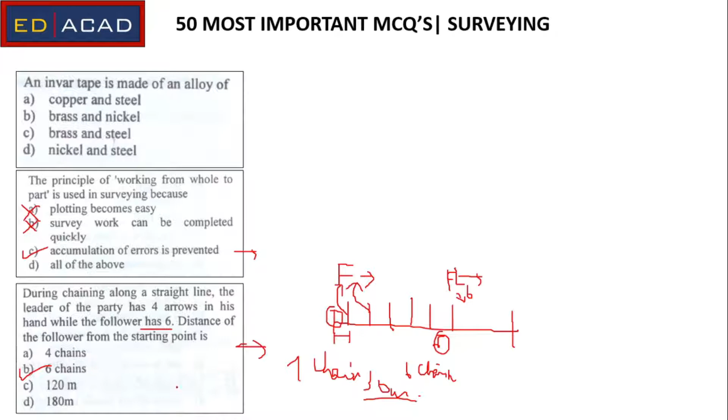Let's move ahead, let me clear this.

Let's understand a few things here. The brass tallies are provided at every 5 meter distance from the starting point of the chain, so they'll be provided at 5 meter, 10 meter, 15 meter and so on. But at the first 5 meter distance, the brass tally provided has a shape like this — these two things will not be here, it will only be like this. So this is the shape at 5 meters.

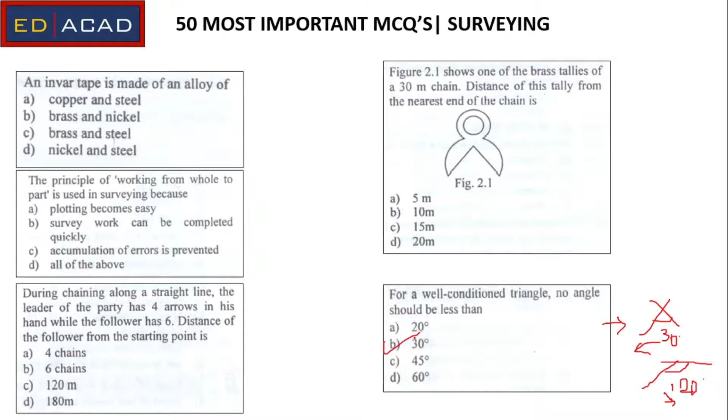Let's understand this. In an optical square we have two mirrors, and these are placed at an angle of 45 degrees, and we need to do some adjustment while taking measurements with the optical square. But when we use a prism square, we have a prism placed inside a circular tube, and these angles are fixed.

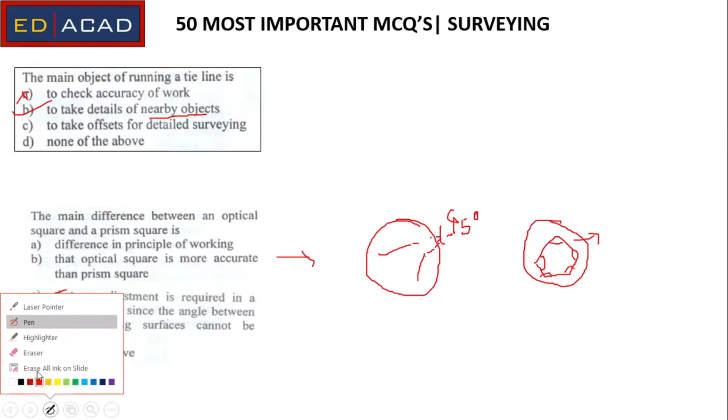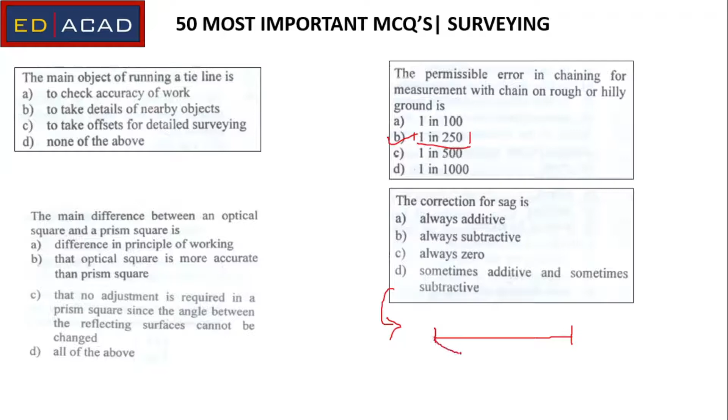Next, the correction for sag. Let's understand this. When we use a chain or tape to measure a horizontal distance, due to sag the position of the chain or tape will be something like this. So the correction formula is true value minus measured value.

In this case, this distance will be the true value. But due to sag, the measurement you take will be the sag measurement, so this becomes the measured value. The correction equals true value minus measured value, and you can clearly see that the measured value will be greater than the true value, so the sign of correction comes out negative. So the correction for sag will always be subtractive.

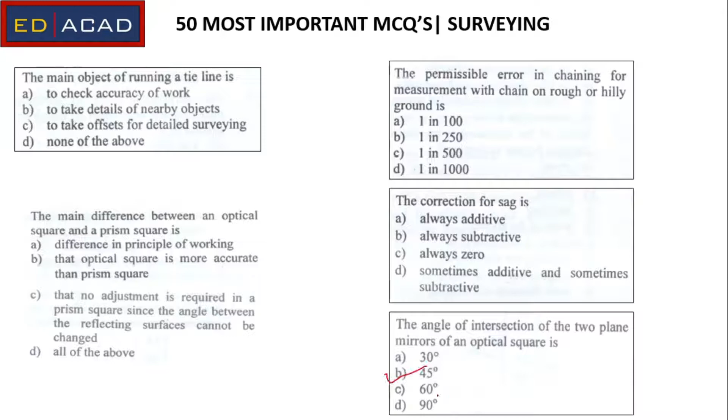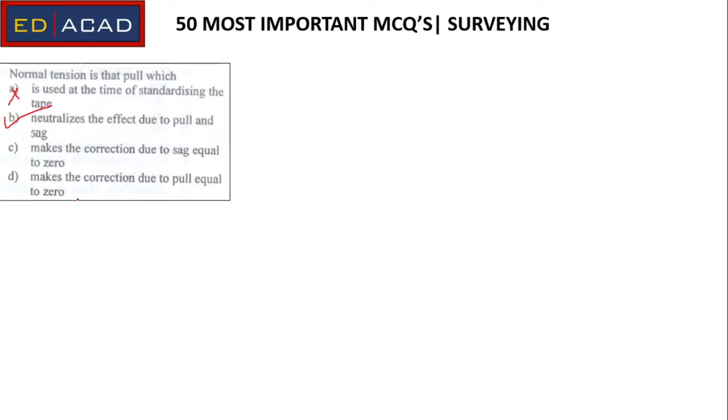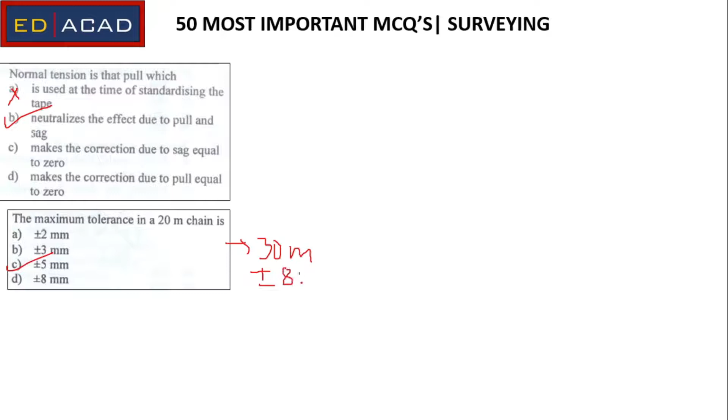Let's move ahead. The maximum tolerance in a 20-meter chain is plus minus 5 mm. Also, in case of a 30-meter chain, the tolerance is plus minus 8 mm. You should keep this in mind.

Let's move ahead. If the fore bearing of line AB is 35 degrees and that of line BC is 15 degrees, then the included angle between the lines is... Let's understand the concept of included angles here.

For finding the included angles, you need to keep two things in mind: the included angle is always measured in the clockwise direction, and it is measured from the previous line to the next line. This you should keep in mind.

Let's look at the problem. If the fore bearing of line AB is 35 degrees, let's plot this. Let's say this angle is 35 degrees. This will be our A, this will be our B. And that of BC is 15 degrees, so this will go something like this. So this will be C, and this angle will become 15 degrees.

So the included angle between the lines—let's apply these two parameters here. The included angle is always measured in the clockwise direction, so the clockwise direction is either this or this. The second parameter says from previous line to next line. When we move in direction ABC, our previous line becomes AB and the next line becomes BC. So from previous line to next line, this will be our included angle. Let's show it in a different color—this will become our included angle.

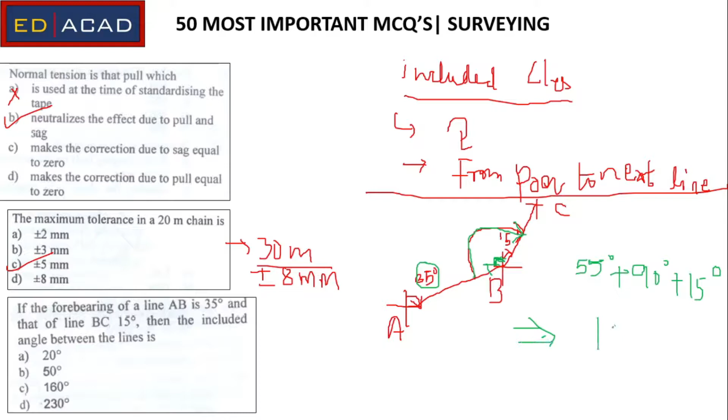Option C will be correct. Okay, let's move ahead.

So in the prismatic compass, the magnetic needle moves with the box. The line of sight does not move with the box. The magnetic needle and graduated circle do not move with the box. The graduated circle is fixed to the box and the magnetic needle always remains in the north-south direction.

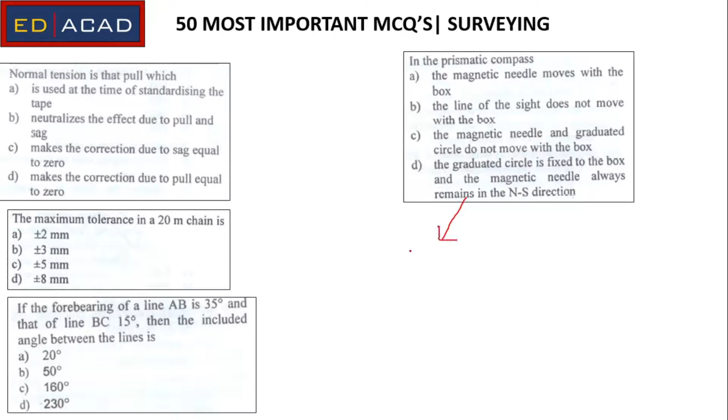So generally we use two types of compass in surveying. The first one is the prismatic compass, and the second one, widely used, is the surveyor's compass. I'll show the picture of both of these compasses. This is the prismatic compass which you can see in the figure, and this is the surveyor's compass.

So now let's discuss some of the differences between these two compasses. This will be the prismatic compass, let's write this as PC. Okay, so let us look at some of the

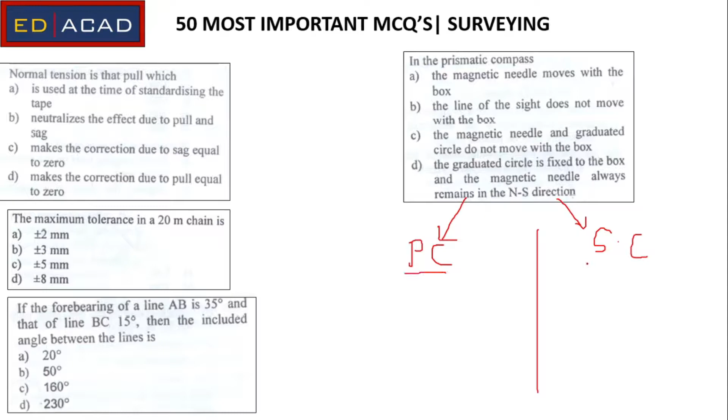differences, the major differences between these two. Let me show you the figure once again. In the prismatic compass, as you can see here, we have a broad needle which is attached to the circular graduation dial. So the graduated dial or graduated ring is attached to the needle, which is of broad needle type, while in the case of surveyor's compass we have a bar edge type needle, and this needle, you can see here, it's not attached to the graduation ring, it is free. So the graduation ring in case of surveyor's compass is attached to the box, it's not attached to the needle.

So these two differences you would have noticed. Then the next difference is that in case of the prismatic compass we get the reading in whole circle bearing, because the graduations are something like this. So we have north, south, east, west. So we have 0 degrees at the south, 90 degrees here at the west, then 180 degrees here, and then 270 degrees here.

While in case of surveyor's compass, the graduation is something like this. So here is our north, here is our south, here is our east. You need to remember this, that east in case of surveyor's compass comes on the left side, and then west. And we have 0 degrees at north, 0 degrees at south, 90 degrees at east, and 90 degrees at west.

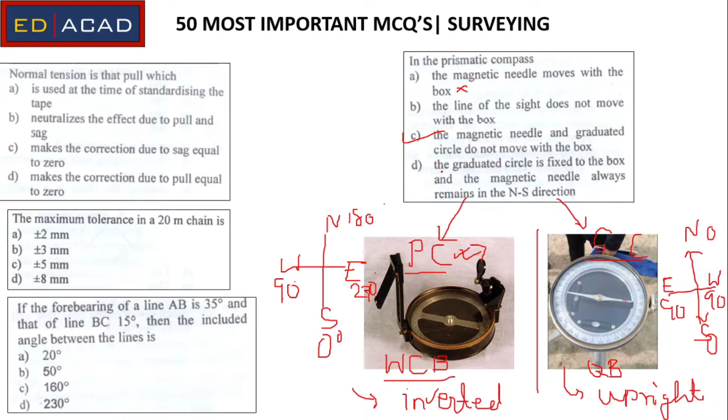The magnetic needle and the graduation circle are attached to each other and they are placed on the pivot, and they do not move with this box. The graduation circle is fixed to the box — no, so this becomes wrong. It is not fixed with the box. That is the case in the surveyor's compass. So option C will be correct. Let's move ahead.

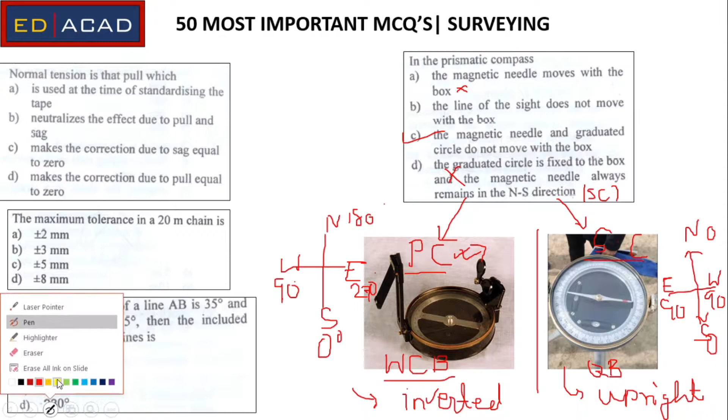Answer A is right. Next, which of the following shown in figure 2.3 represents the correct graduation in surveyor compass? We have 0 degree in case of surveyor compass at north and south, and west and east - no, here in this direction east is there. So option D is correct, just as shown in the last slide.

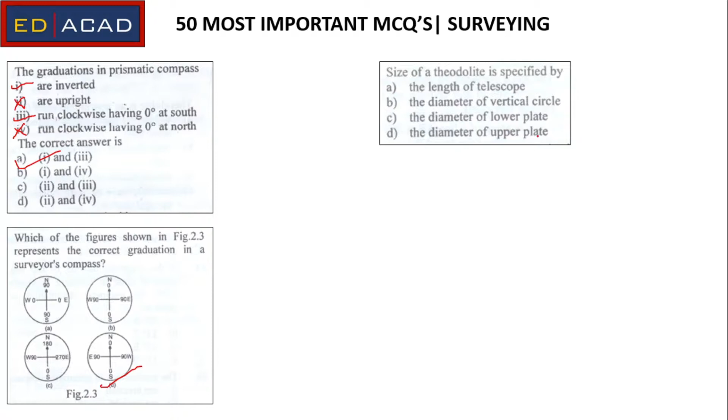Next, the size of a theodolite is specified by the length of the telescope, the diameter of the vertical circle, the diameter of the lower plate, or the diameter of the upper plate. The size of the theodolite is specified by the diameter of the horizontal circle, and in the horizontal circle, the diameter of the lower plate. So option C will be the correct answer.

Next, a telescope is said to be upright when the vertical circle falls on the left side of the surveyor and the bubble is up. It will be called inverted when the vertical circle is on the right side and the bubble is down. Let's look at our options: the vertical circle is to the right and the bubble is down - so option A is correct. Let's check the others: vertical circle to the right with bubble up - no. Vertical circle to the left - wrong, it should be at its right. Again vertical circle to the left - wrong. So option A is correct.

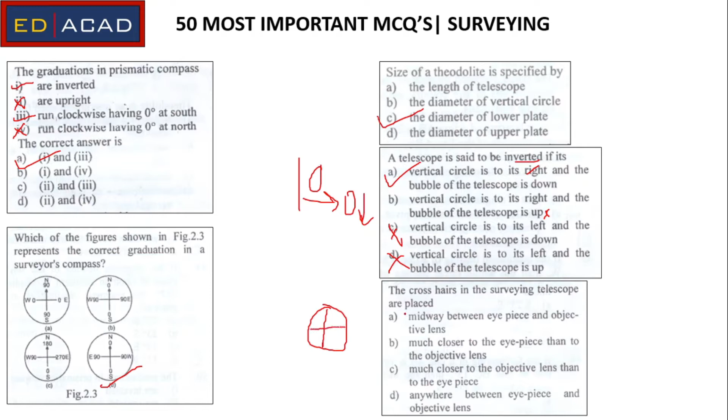Next, the crosshairs in a surveying telescope are placed - let's look at the options: midway between the eyepiece and the objective lens. So this is the eyepiece, this is the objective lens, here we have our eye, and from here we look - this is our objective lens. The crosshair is placed somewhere here, very much close to our eyepiece. So the option stating it's much closer to the eyepiece than to the objective lens - option B - will be correct, because it is placed much closer to our eyepiece.

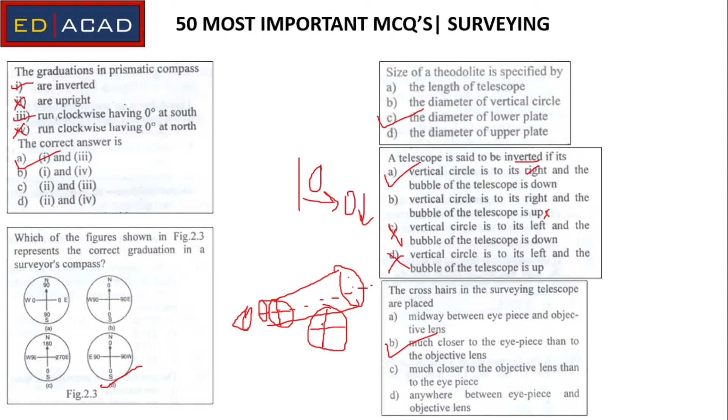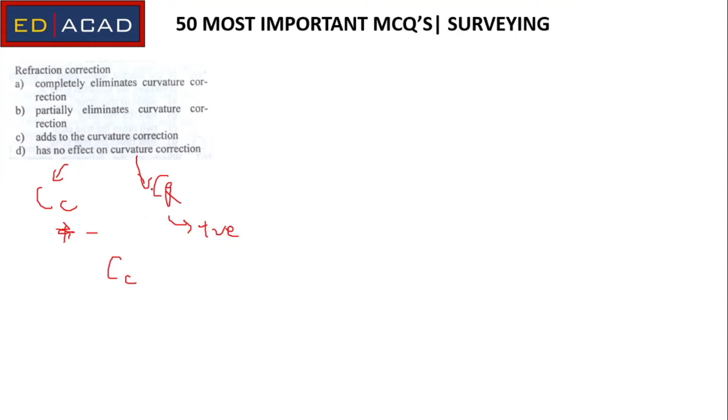Next: does refraction correction completely eliminate the curvature correction, partially eliminate it, add to it, or have no effect on it? We know we have correction due to curvature and correction due to refraction. The sign of curvature correction is negative and refraction correction is positive. So when we do the combined correction, the refraction correction partially eliminates the curvature correction. So option B would be correct.

Next, a level was set up at point A and the distance to staff station B was 100 meters. The net combined correction due to curvature and refraction applied to the staff reading - the formula for combined correction is minus 0.0673 d squared, where d is in kilometers. We have 100 meters distance, so in kilometers that's 0.1, and minus 0.0673 into 0.1 into 0.1, basically dividing minus 0.0673 by 100. So the correct option should be C, minus 0.000673 meters. I think this should be clear.

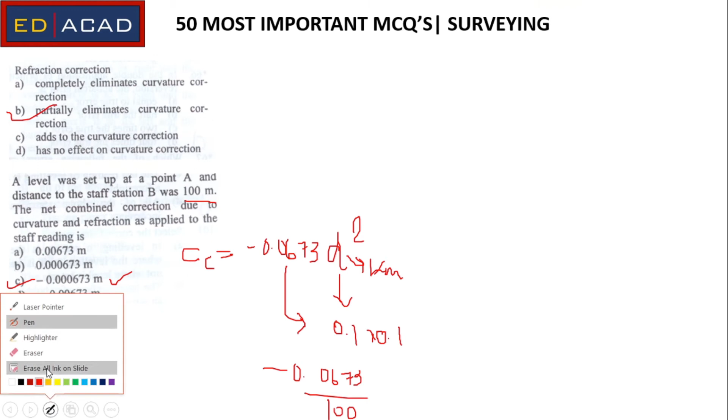While doing leveling in undulating terrain, it is preferable to set the level on the top of the summit, the bottom of the valley, one side of the slope, or anywhere. The correct answer is one side of the slope.

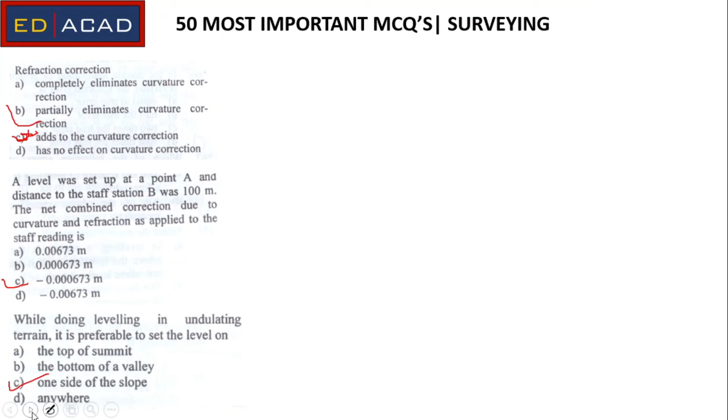The sensitiveness of a level tube is designated by the radius of the level tube, the length of the level tube, the length of the bubble of the level tube, or none of the above. The sensitiveness of level tube is designated by the radius of the level tube. I have also covered this topic, the sensitivity of level tube, in one of the lectures - you can go check that out, I have clearly explained everything regarding this topic.